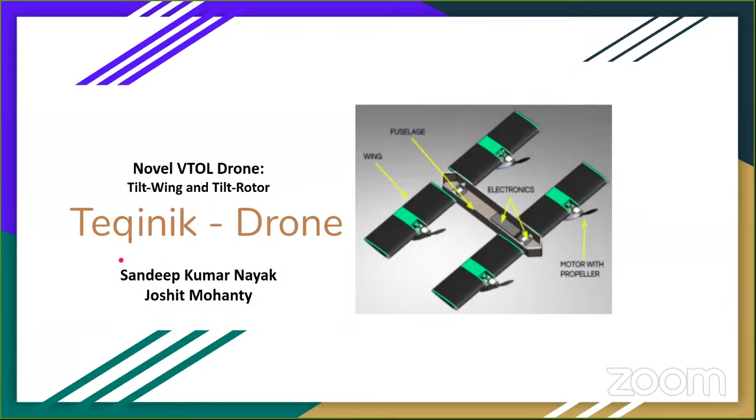Good morning, everyone, and all the dignitaries. First of all, we would like to thank you for giving us this opportunity. The figure you see here is what we are trying to present, a very novel tilt wing and tilt rotor design, and we are going to speak about what's so novel about it. But first, we'd like to give you a visualization of what vertical takeoff and landing is.

The need for vertical takeoff and landing came from the fact that fixed wing has very little agility but high endurance. However, rotor wings such as helicopters or quadrotors have more agility but a little less endurance. So how about we mix and match? That was the idea.

But the main concern for a VTOL is this phase, the transition mode — how do you move from vertical takeoff to cruise condition and vice versa? There are also aerodynamic challenges, for example endurance, but there are slip streams from the rotors, and rotors have a lot of efficiency loss. So how do we cope with this trade-off?

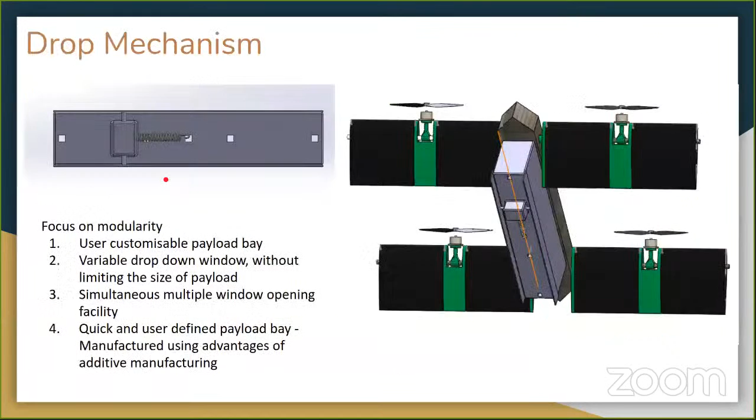This is highly endurant and highly agile because, for example, in a quadcopter, agility is defined by changing the direction and RPM of the motors, and for a wing it's having flaps. However, here we can just directly change the angle of attack of both the rotor or the wing to change direction, so that's quite agile, something similar to that of a hummingbird.

We have a long range, and our payload capacity can vary from 600 grams to 1 kg at a cruise speed of 5 meters per second to 10 meters per second.

We have kept all this design by keeping minimum in mind. So this is the bare minimum we provide at 60% throttle. If we increase the throttle or the speed of the cruise, we can increase the payload capacity further.

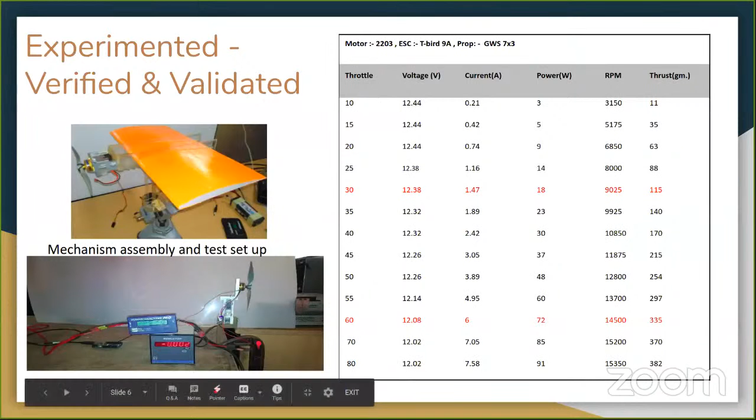We did several testing of the motor and propeller combination and came up with this fact that after doing a wind tunnel test, we get 60 to 70% more payload carrying capacity compared to having the same tilt rotor without a wing. The choice of wing was also very interesting. We kept the coefficient of moment very low in mind, and also balanced a trade-off between the lift to drag ratio.

So that's kind of, minutes are over, one minute remaining, thank you so much. That's the kind of design that we were aiming for.

In future, we want to build the controller because the controller here we think is going to be really important. However, not just the controller, we have planned another thing.

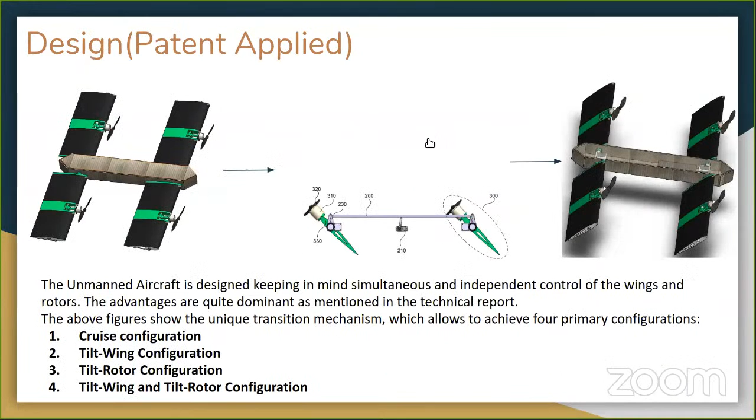On the fuselage, we'll have a sliding mode payload. Instead of keeping a fixed battery and ESC position, we'll have a mount that will slide according to the change in the center of gravity. This will give us very one-directional controllability. If we can have that, then the entire controllability of the aircraft during sudden gusts of wind can also be neutralized.

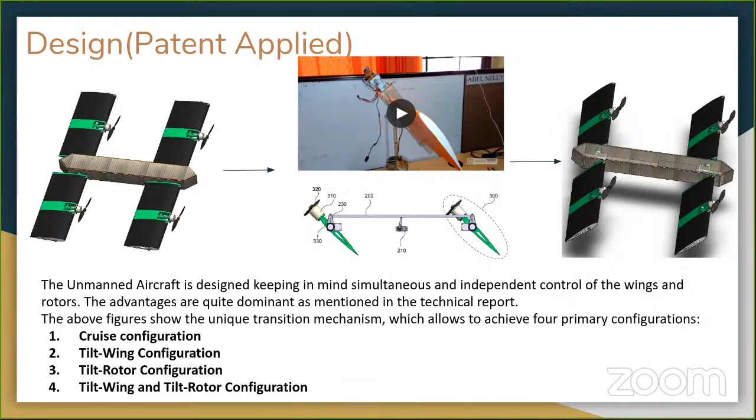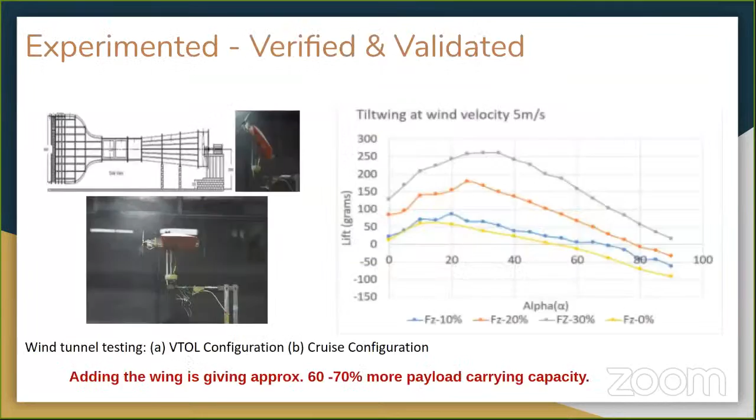Thanks a lot for your presentation, and thank you so much for maintaining the time limit. It's a very good start. Thank you, sir. I would like to invite Shri Deepak Lekhi if he wants to start with any questioning, and then we'll move to Saurabh Bagare.

Deepak ji, would you like to ask any questions to Team Teqinik? You are on mute, sir. You have to unmute yourself. Sorry sir.

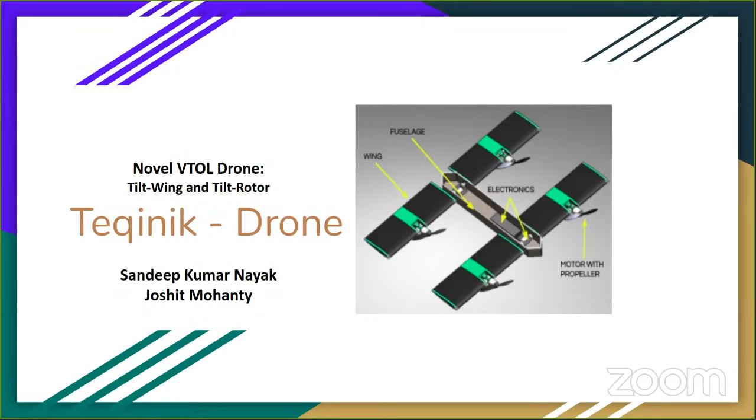My first clarification is on the range of payload you are trying to achieve. Deepak sir, I cannot hear your voice clearly, can you please speak again? What is the range of payload you are planning to do, so how much is the payload? The payload is around 600 to 1 kg we can take.

Look, when you design, and if you say that the payload is 600 to 1 kg, it immediately raises a question on your calculation and feasibility, because 600 to 1 kg is a very large range for a person to state as the payload. If you had said 600 to 650 grams, I would have understood.

So Deepak ji, his answer is that it can carry a payload of 600 grams to 1 kilogram. And what is the all-up weight of this UAV? Deepak sir, I cannot hear. What is the all-up weight of your UAV? The all-up weight of the UAV will be around, if I consider with payload, 2 kg, but only the UAV will be around 1 to 1.5 kg.

So that means around 50% of the weight can be cut to payload, if it takes max for both. So his question is that you are having a 50% payload fraction, you are able to carry 600 to 1 kg in a UAV that weighs 1 to 1.5 kg. The thing is, in this design, if we increase the speed of the UAV, it can carry up to 1 kg, so at minimum it's 600 grams.

Okay, thank you. Saurabh Bagare, would you like to? Yes, I have a few design related queries.

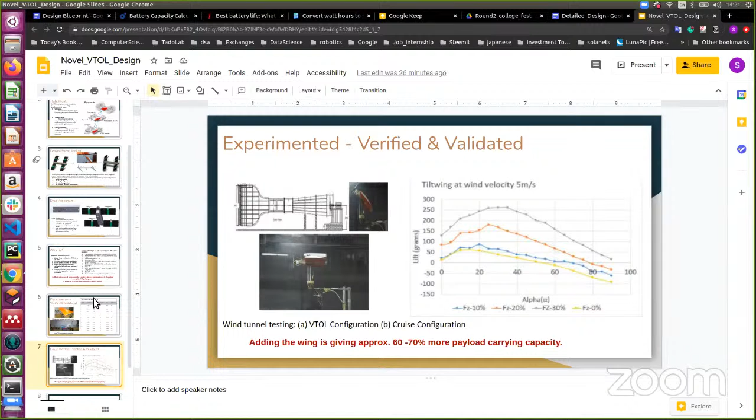Okay, so yes, you have 5 minutes more. Okay, so there is one question which has come from the audience. There is a Dr. Rajesh Joshi in the audience, a very accomplished aero modeler from Nagpur, and he has asked a question regarding the vertical stability during the transition. Can you comment on that?

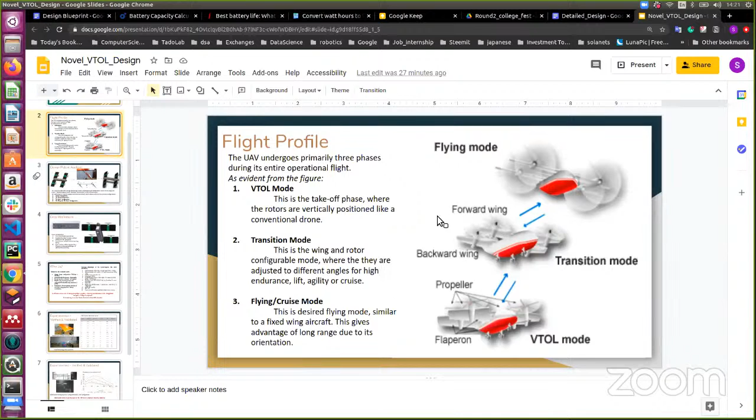Regarding the vertical stability during transition, sir, definitely these are concerns that we also have, for example the downwash and the wing coefficient of moment. Just because the wing is present and is not fully symmetrical, there will be an inherent coefficient of moment. So for stability during the transition, there are two conditions. If there is no gust of wind, no external condition, and we do it in a perfectly situated environment, then we need the sliding mode CG shift in front and a simple PID controller that tries to control the horizontal stability when the

vertical takeoff is happening. Now, let's say there's a transition happening, from this configuration to this configuration. As this mechanism makes the transition, there will be a counterbalance mechanism with the same servo motor, a counterbalance that goes behind. During the transition, if we didn't have a sliding mode CG shift mechanism, the additional inherent moment would have to be handled by changing the propellers or the angle of each of them. But since we have a sliding mode mechanism, this can be tuned along with the transition.

So it is our hypothesis that by introducing this inherent stability of the entire plane, during transition the counterbalance can help with additional balance. So our wings can focus only on agility and maneuverability rather than balancing. That's what we aim for.

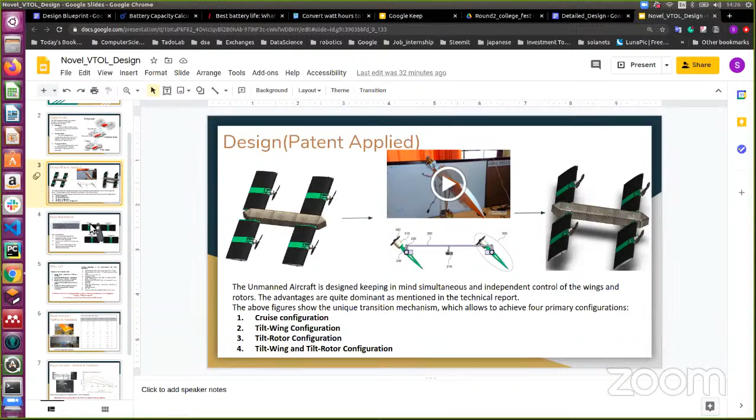I think we'll move ahead in the interest of time, but I must commend you on your attempt to go beyond the ordinary and try out new configurations. On that account, it's a good design, but it is far away from being established as a feasible concept. Yes, sir. All right, let's go ahead to the next team.

The next team I want to invite for the presentation is team Shivam Omni-Role Electric UAV. You can share your screen and start your presentation. Namanuddin, please keep a watch on the time, both for the presenter and the judges. Okay, sir. The judges get 10 minutes and the presenter gets 5 minutes. Shivam Bhandari is trying to share his screen. Your screen is visible now, but make it full screen by clicking the button at the bottom.

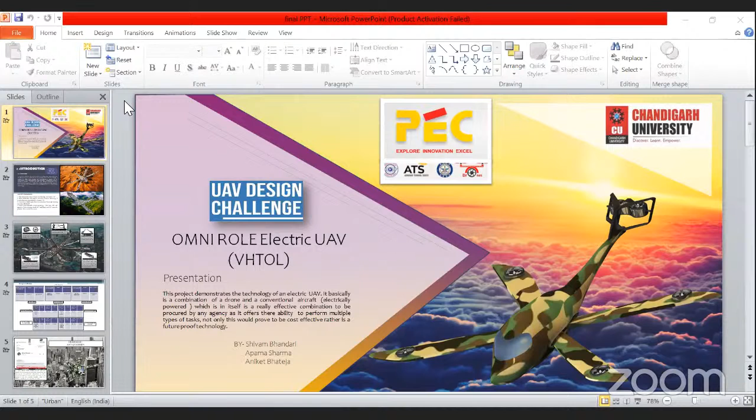Can you make it full screen, please, Shivam? Oh, looks like we have lost him. Shivam, are you there? Can you hear us? Shivam, are you able to hear us? Sir, this is Aniket, I am his team member. I will present this presentation. Okay, can you make it full screen? Shivam, are you able to listen to sir? If not, I'll do it. That is why I have copied your PPTs. So I think, Shivam, you stop sharing your screen. Shivam is requested to stop sharing his screen so that I can present it from my side.

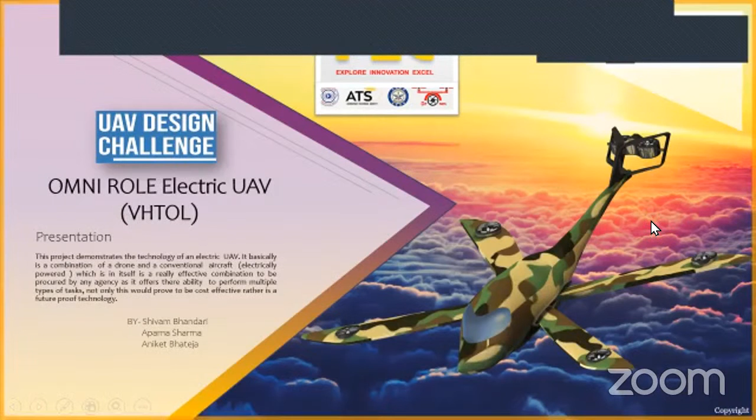Okay, I am presenting it from my side. Just give me 1 minute. Right, so Aniket, you can start. When you say next, I'm going to go to the next screen. Sir, I'm not able to see the presentation. Your PPT is not visible. Okay, wait, I'll stop the share and share it once again. Are you able to see it now? Yes, sir. Now it's visible. So Aniket, when you start speaking, Namanuddin will start the timer, and I will click on the PPT when you say next. Go ahead. Sir, am I clearly audible? Absolutely audible, no problem. Please start.

We all have seen the futuristic cities in a lot of movies where we have seen small drones and UAVs flying among or above the huge skyscrapers. Even in some movies, there are shots which showcase a UAV chasing down fast moving vehicles, tracking down people, and shooting them down with a missile. This is the kind of future for UAVs we are looking forward to. Today we are going to witness one such one-of-a-kind omni-role electric unmanned aerial vehicle.

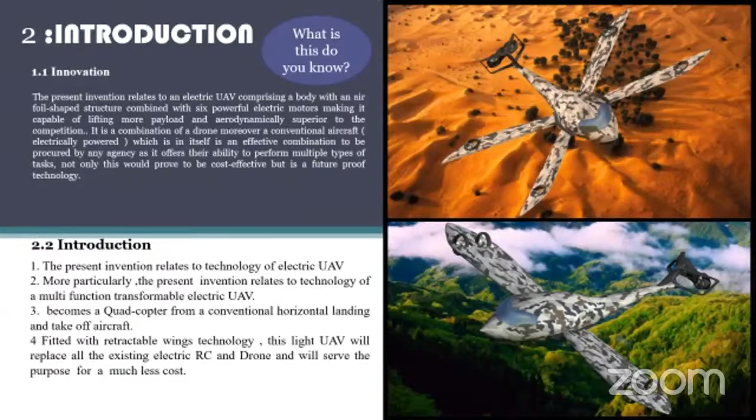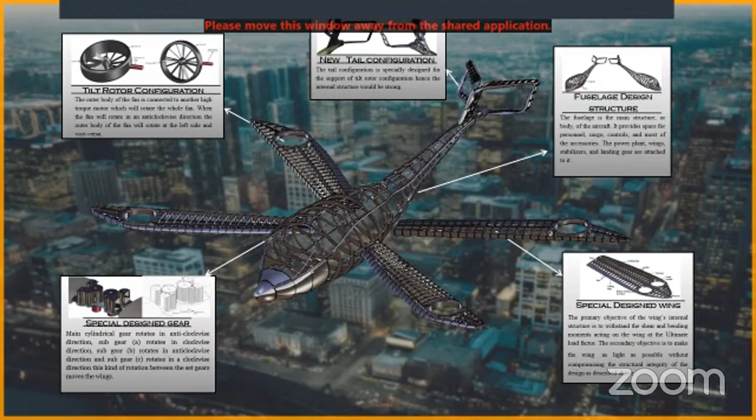On your screen are the key components of our omni-role electric UAV: the special gear mechanism, the tilt rotor configuration motors, the new unconventional tail design, a highly resilient fuselage structure, and a wing design able to withstand all the vibration and disturbances caused by the motors and the loads applied to it. Next slide. This is the internal aircraft structure, made so that it can withstand all the loads and moments applied on it during transition, cruise, and landing. Next.

The main questions asked for this project concern its capability to withstand the vibrations caused by the motors, as it is fitted with 4 motors on the wings and 2 on the empennage. So we have used the finite element method (FEM) to show that it can withstand the loads applied to it. We assumed a simple model of the wing as a cantilever and applied a point load on it for this first experiment. The second challenge we faced was the disturbance created by the first propeller on the second one during cruise. We used Fluent analysis for it and showcased different variations of the fluid, taking pressure as the base.

4 minutes are over, 1 minute is remaining. Yeah, thank you. We have seen that the disturbance is not a deal breaker for this project and we can work on it very easily. Next.

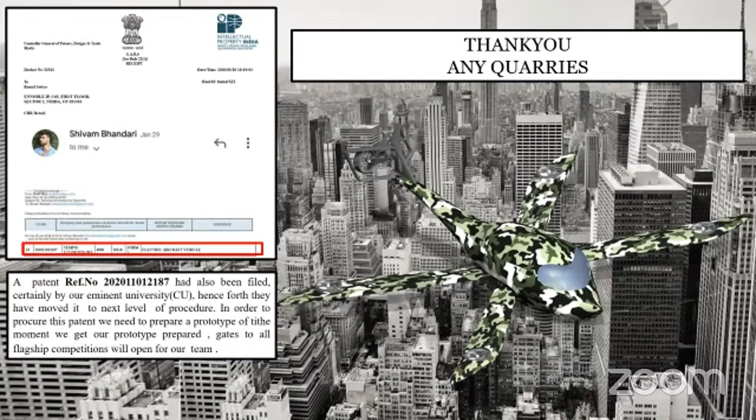Yeah, I have done this. Next. To conclude, I would like to say this omni-role electric UAV has a realm of possibilities to work upon. It gives us an ocean of opportunities in regards to versatility, and I believe this design is a cut above. Thank you.

Okay, thank you so much. Thank you so much for maintaining the time. Yes. Let me now start first with Mr. Saurabh Bagare this time. Hello. Hi. So how much time do I have to count for judges? 10 minutes. Okay, sir. Thank you. So, Mr. Saurabh Bagare, you can start.

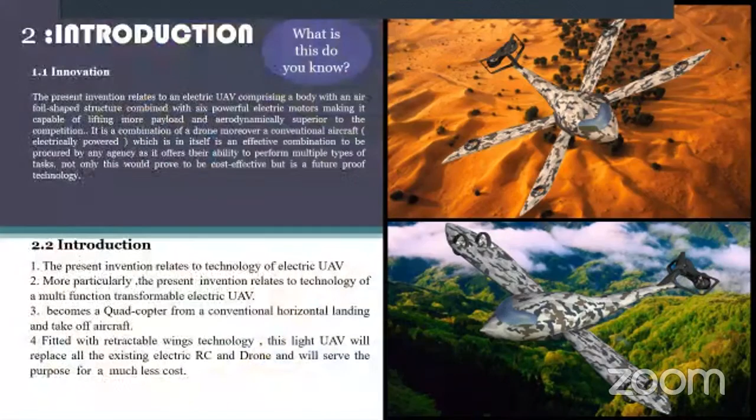Yeah. So as Professor Pant mentioned in the last project, it's very easy to say such a concept, but when it comes to the math, it's extremely difficult. For example, you said you did the testing of fans in ANSYS Fluent, right? Yes, sir. The configuration that you have tested is like a ducted fan configuration. There is no interference between the two fans. But if you see your actual wing design, your front propeller and rear propeller will interfere because of the wing that is between them. So claiming that this won't create any issues just because you have taken an ideal condition is questionable when you're doing Fluent analysis, especially for the aerodynamics of an aircraft.

Sir, I cannot see any wing in between. It's just a ducted fan configuration. Sir, actually, yes, you are right that we have taken this ideal assumption. But this concept is really in its experimental stages. What I meant is that it won't be a deal breaker, because we have gone through the literature, and from this testing we have seen that yes, there would be some interference, but it won't be much, sir. It won't be a deal breaker such that it could not fly in that configuration.

Okay, another question. When your aircraft is in steady level flight, the wing is closed, right? The two wings are connected. So in steady level flight, your wing will act like a symmetrical aerofoil, which means there will be no lift produced by your wing. No, sir. I think the lift would be produced because, if you have seen, it is an elliptical wing configuration. And as we all know, it has the highest efficiency, so yes, sir, it will produce lift.

I'm not talking about the planform. I'm talking about the cross section. The cross section is symmetrical, right? No, sir. We have used the NACA 4412 airfoil, tested its limits to generate lift, and got the desirable numbers. If you have used NACA 4412, then you cannot mount a separate propeller on the front part and a separate propeller on the rear part, assuming that both of them are the same. So this is, I would be honest, we haven't considered this factor, but it's in the testing phase. And I believe, sir, this issue would be resolved if it is there.

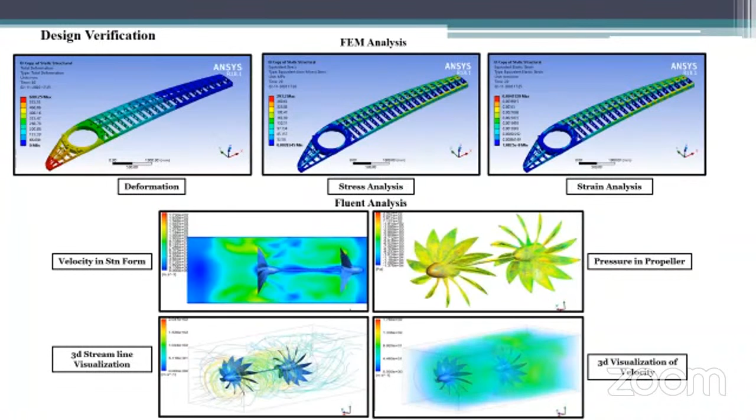I'm sorry, you are trying to mislead the judges by showing some colorful pictures and assuming that we will get impressed by the colorful pictures, but we look at the numbers. Look at the numbers that you have got. Yes, sir. Look at the pressure in the propeller that you have got. It's 3,425. What are the units?

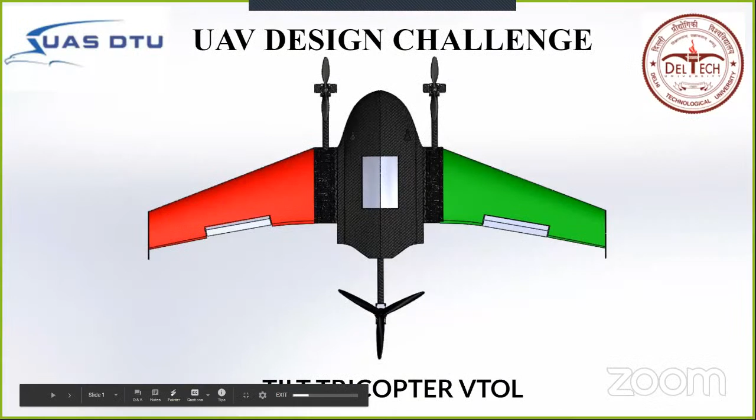Saurav? Am I audible? Yes, you're audible. You can now share your screen. I have allowed people to share the screen. I would request Anand Mohan Singh and Priyanshi Jain to also check their mics. So are we audible? Yes. Priyanshi? Yes, sir. Am I audible? Yeah, but Priyanshi, there is echo from your side. Is the screen visible, sir? The screen is visible. The moment you start speaking, we are going to start timing you. Okay. Fine, sir. I'm ready to begin.

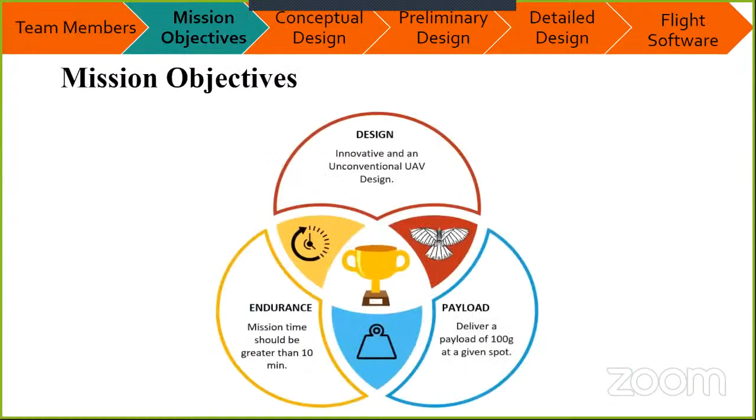Good morning, everyone. I'm Saurav Alawat of Team UASDTU. This is our UAV Design Challenge submission on Tilt Tricopter VTOL. Our presentation will go through the design approach of the mission objective, from conceptualizing the design to preliminary and detailed design phases, concluding with the flight software used. Anand Mohan Singh and Priyanshi Jain will join me in presenting, where we will achieve the mission objectives of delivering our payload on an unconventional design.

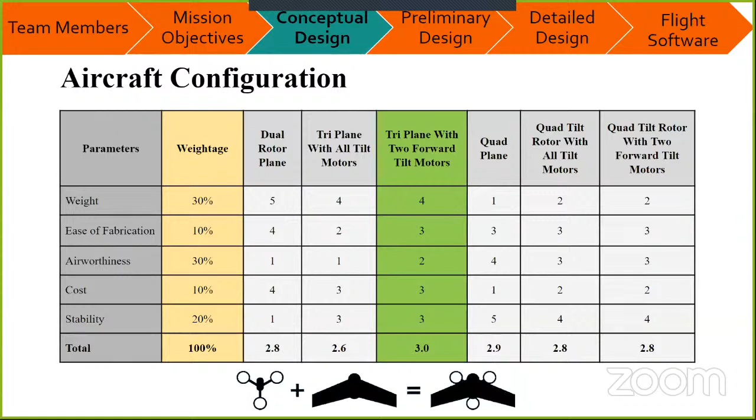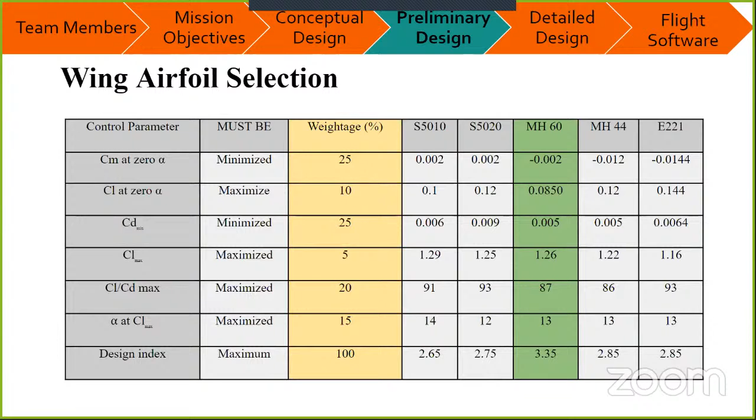Exhaustive research was carried out and different configurations were studied. Keeping the idea of unconventional design in mind, a plane with vertical takeoff and landing is selected. Out of various possible configurations, tricopter configuration was selected considering weight, airworthiness, and stability. To enhance lifting characteristics, blended wing body configuration was selected, which is more aerodynamically efficient. For wing design, various airfoils were analyzed on XFLR5 considering pitching moment and lift coefficient. MH60 airfoil was selected as it has the highest design index.

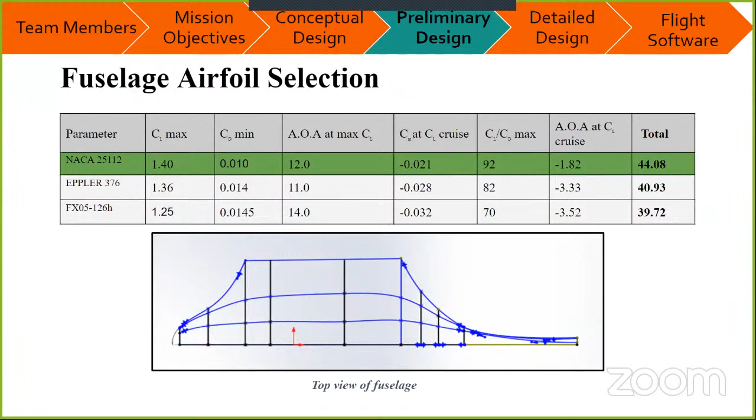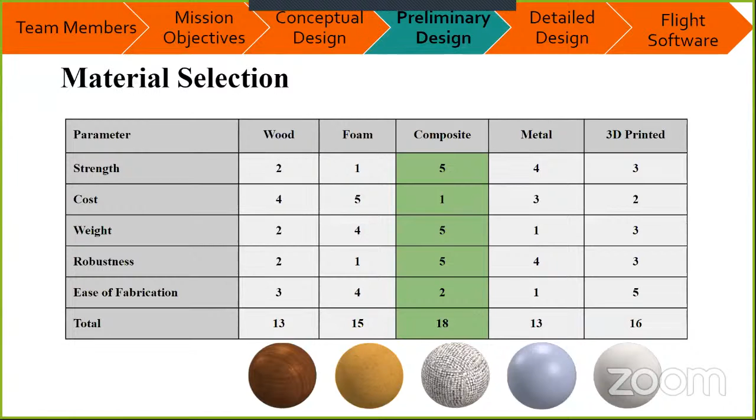Following wing analysis, fuselage airfoil was also analyzed on the same software. NACA 25112 was selected owing to its self-stabilizing characteristics. A brief market review of available materials and manufacturing trends in UAV design led us to choose the highly favorable composite structure with its light and robust framework. Further, the carbon fiber composite was distributed according to various available densities and fiber arrangement types over spars, ribs, and various skins of the body.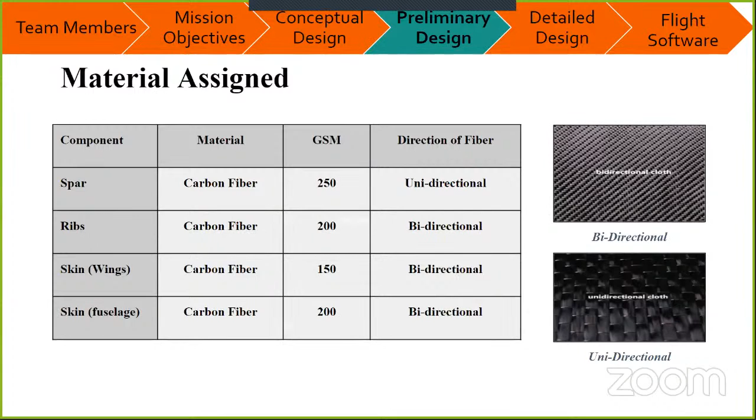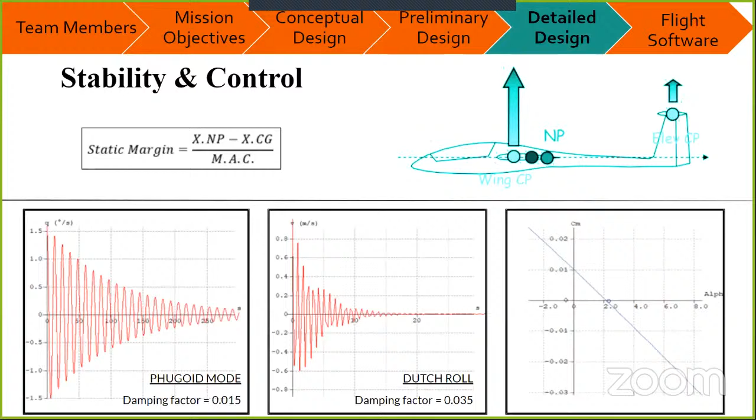All three axes of stability were investigated on XFLR5 by maximizing damping factors of Dutch roll mode and phugoid mode. The aircraft design was reiterated until a desirable value of static margin was obtained. Further, wing parameters were optimized using a genetic algorithm with certain variables and constants. Input parameters like random population converge to an optimum solution until net fitness of the generation reaches a maximum saturation point. CFD analysis was performed at every design stage to maximize lift-to-drag ratio.

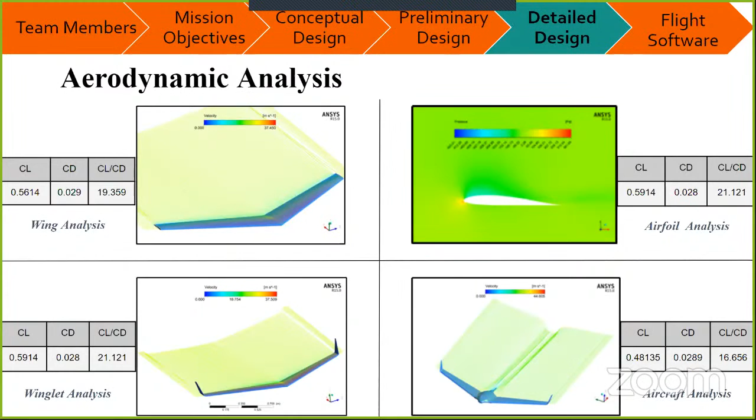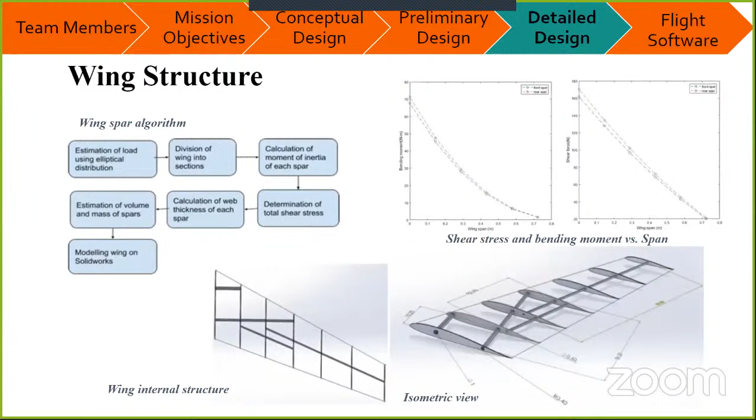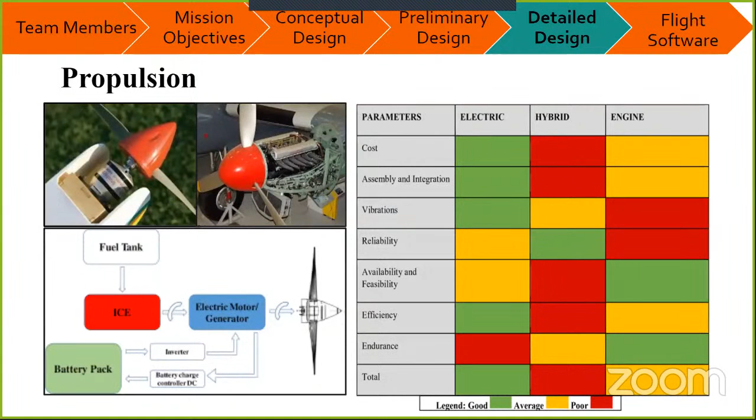Structural analysis on key design points like the motor boom and wing was conducted, and results were obtained on Abaqus by various iterations of loads. An algorithm which refines our wing geometry underwent steps of estimation of load, division of sections, to the calculation of moments of inertia on each of these parts to determine its final geometry. An important aspect of maximizing endurance was propulsion selection, where we arrived at an all-electric solution owing to its ease of operations and overall efficiency. The electric drivetrain was further analyzed and optimized, and the final motor and propeller configuration was selected for both hover and cruise specific motors.

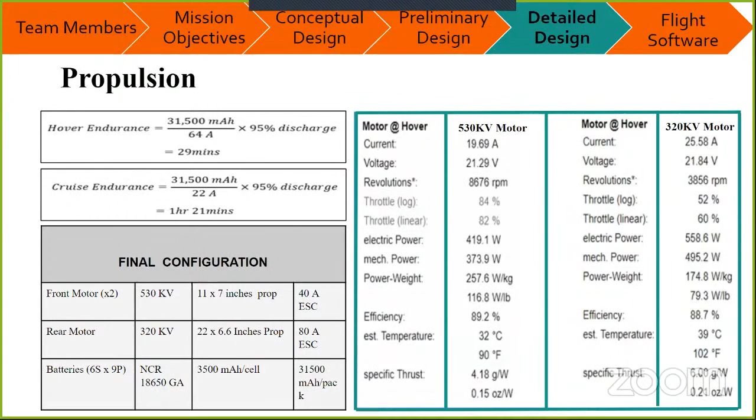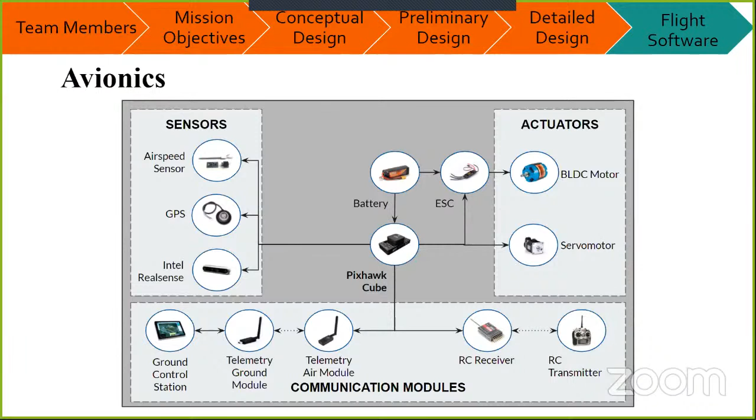A special consideration was given to designing and perfecting the tilt mechanism and its modus operandi of an unstable design governed by the autopilot cycling between both the hover and cruise segments of the flight. Pixhawk Cube is our flight controller, which controls actuators like servo motors and BLDC motors using the sensor data from various sensors such as airspeed sensor, GPS, and Intel RealSense. A ground control link is maintaining communication with the tricopter through telemetry, and an RC link is used by the safety pilot for manual control.

Over. 1 minute is remaining.

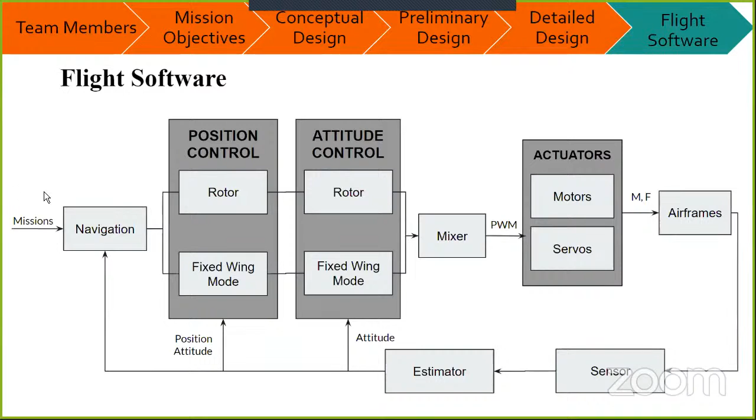Thank you. The sensors, with the help of estimators, provide position and attitude feedback to the previous loops. That would be all. Thank you.

Okay. Lekhi ji, shall we start with you? Yes, sir.

Sir, my first question is about this three propeller scheme you have used. Do all the three propellers have the same motor power? No, sir. The forward motors are actually half the thrust of the rear motor. Basically, the center of gravity is placed on the midpoint of the y-axis in the direction of motion. The rear motor has twice the propulsive power of the forward ones. Basically, we iterated various motor configurations on how we could optimize our cruise endurance. The forward motors are pinpoint designed for cruise efficiency.

Like when they operate at their pitch speed of 25 meters per second, the UAV will be flying at 25 meters per second, and the thrust produced will be equal to the drag of the aircraft. The remaining thrust during hover phases will be handled by the rear motor and the front motors together. And you are only tilting the front propellers, not the rear one? Yes, sir, we are only tilting the forward ones. Reason for that? We have sufficient thrust from the forward motors to complete all segments of our flight. The forward motors have a maximum T/W of 0.8, which is enough for any normal maneuvers in the cruise condition.

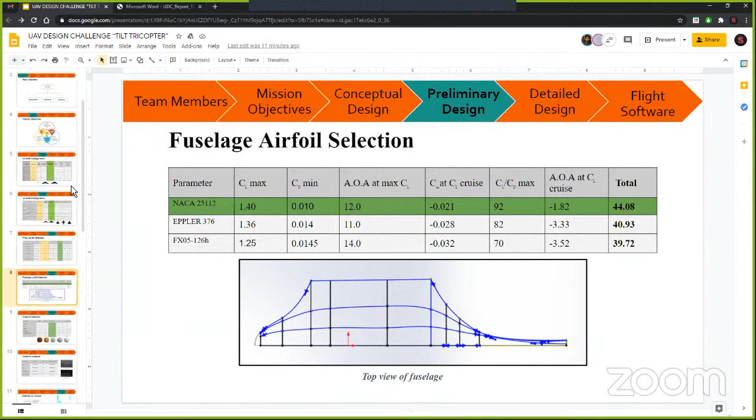Do we care about that? We just want an aircraft to turn in any way possible. If you are flying and you want it to turn, multi-rotor mode, we are operating in a tricopter configuration. A tricopter is inherently stable with its vector yaw mechanism. So when it's hovering, it can act as a normal multi-rotor and do its roll.

I meant a steady level turn. In a steady level flight, we have our ailerons. We fly as a normal blended wing configuration. We have Skywalker X8 models available in the market, so we have ailerons. So my main query is, you will turn using the aileron coupled motion, right?

Yes sir. So because of that aileron coupled motion, you will have a roll moment that will cause your propeller at the rear to cause a drift that will change the altitude of the aircraft. The rear motor is not operational on the cruise segments of the flight, it shuts down during transition. So it shuts down whenever your aircraft is flying in steady level? Yes, the forward rotors will tilt forward and it will act purely as a fixed wing during the cruise conditions.

Then my next question is, in your comparison graph that you have shown with your configuration against other configurations. Yes, this is a diagram. Based on the values you have put, I can see that you have assumed your design to be better and put the values accordingly in the table just to show that your design is better. No sir, the fact that we assume our design is better is based on the market research that we conducted.

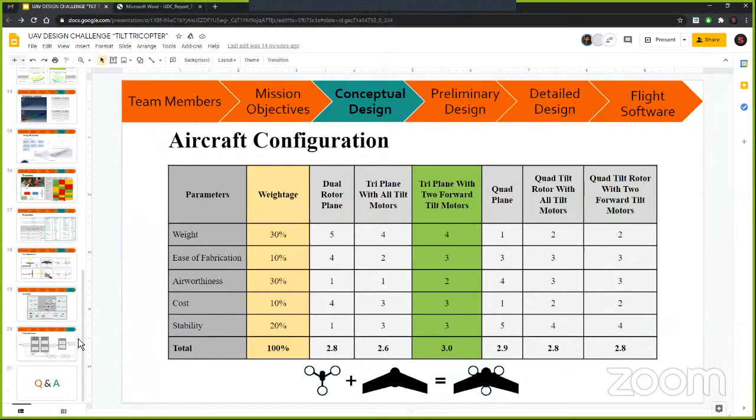Okay, my last question is to your control systems person. You're using PX4, right? Yes sir, we are using PX4. PX4 has no dedicated mode for your configuration. It has sir, it has a dedicated mode for blended wing and a dedicated mode for tricopter. When you are operating in a VTOL plane configuration, you can enable your Q tilt mask to 7, which is a tricopter.

So you have coupled them? Yes, we have actually tried to simulate it on the SITL software, and we are already working on developing this concept. Okay, but I believe you will need your own code, that's left for the future. Then that's it from my side. Yes.

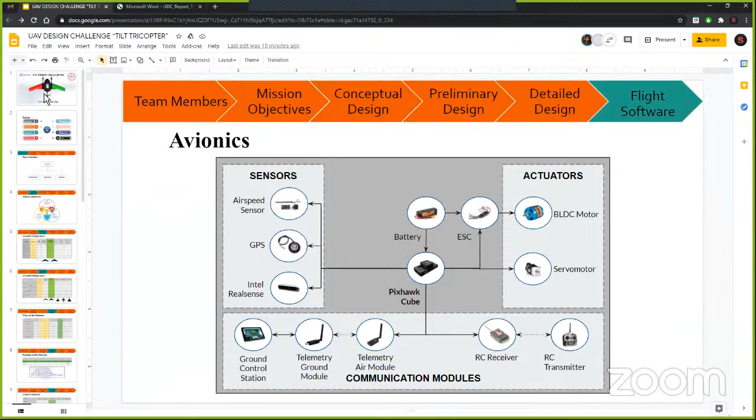Okay, so I only have one comment. If I look at the constraints specified in the document given as the brochure, there is a clear mention that no fixed wing aircraft qualifies for the competition. So you have designed a fixed wing aircraft, but as per the problem statement, a fixed wing aircraft is not feasible. This is a VTOL concept, it may be, but it has all the advantages of a fixed wing aircraft. No, it is a fixed wing aircraft.

Understood sir, and the document clearly says fixed wing aircraft is not feasible. But all our design was towards optimizing the VTOL, even the fixed wing sizing was done so that during the transition phase from multi-rotor to fixed wing... Whatever you may say, but the constraint clearly mentions no fixed wing design will be feasible. Have you read the document carefully? Yes sir. So then why did you design something which is fixed wing when it says very clearly that fixed wing design is not feasible?

I believe that the VTOL qualifies for an unconventional design. No, this is not a VTOL design competition. This is a design competition where there is a constraint clearly mentioning, given in bold: no fixed wing design. No fixed wing aircraft, quadcopter, or conventional design qualifies for the competition.

Then why have you gone for a fixed wing design? I cannot justify more than what I just said. I believe that the VTOL was an unconventional design and it did not qualify purely as a fixed wing. That's why. I have made my point clear because this has been raised by somebody in the audience, very rightly, saying that this particular design does not qualify simply because it is not meeting the constraint. If you have an answer, we can take it. If you don't, unfortunately we will have to disqualify purely because of the problem statement.

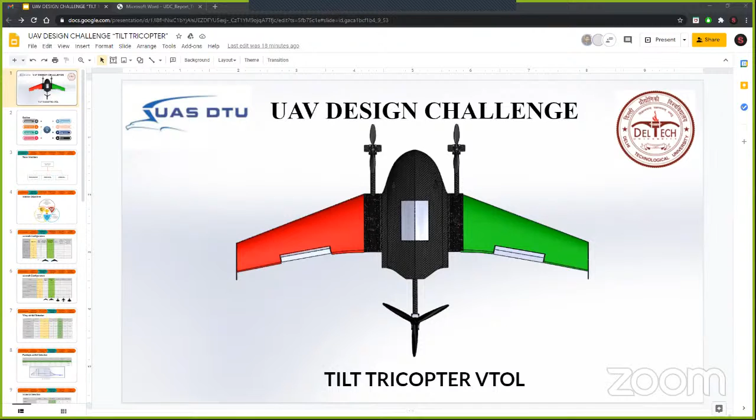I have no questions. You have made so many claims in your design, we don't even have time to go through all of them. For example, you are going for a single spar structure on a wing, which is going to be a fixed wing. I have my doubts whether a single spar structure, especially in the outboard section, right from the mid-span, a single spar, how are you going to take care of the torsion? Tell me. So we have two layers of carbon fiber wrapping the wing, and we're pretty sure that with that layer we'll have structural integrity. Are you saying that a single spar wing...

So we have actually fabricated such a... Let me complete my question. Are you saying that a single spar wing from mid-span can be made torsionally stable just by putting a carbon fiber skin over it? Yes, so we'll also have no discussion. No discussion, thank you so much.

If you are sure, I want to add one last point. I'm asking you a very standard technical question, you have to say yes or no. Yes sir, it will have torsion in it. It will rotate, but it is under our design limits, and we have already manufactured such designs in our laboratory, and we have already flown them.

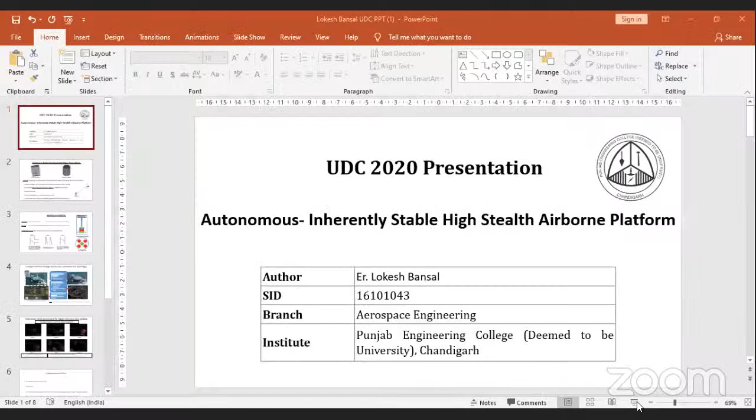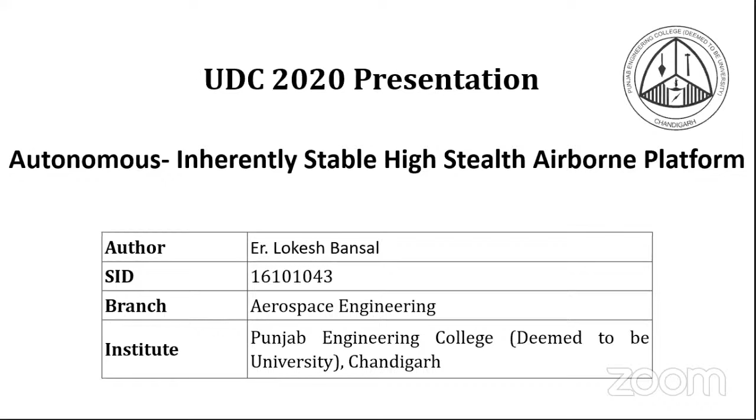Good morning everyone. The topic of my design is autonomous, inherently stable, high stealth airborne platform. Coming to the stealth aspect of the design, the outer body has diamond-shaped sharp projections. These projections will reflect away the radar waves from the source of radar signals. In addition, the surface is coated with radar absorbent material to provide extra stealth. Further, in the UAV there is no heat emitting source, hence no heat sensing device can detect the UAV. Furthermore, the two counter-rotating propellers are inside the casing, resulting in much less noise compared to conventional configurations. Also, the color of the UAV is grayish dark, which results in poor visibility, especially in evening or night times.

Now talking about the working and stability of the UAV. For vertical stability, it is inherently stable because the CG lies below the center line. Then the two counter-rotating propellers provide yaw stability. Now coming to working: for thrust, the two rotors will throw the air through the four nozzles at the bottom surface and create thrust.

For flight direction, we control the direction by thrust vectoring. It can be done by following three methods, as you can see: method 1, method 2, and method 3. In method 1, the nozzle is divided in horizontal and vertical directions, and the flow is divided between these two nozzles to get the desired force components.

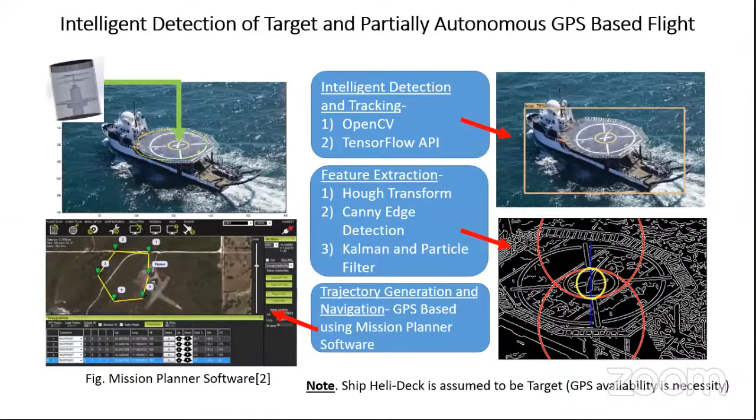So the UAV is able to recognize the environment as well, then detect exactly the center point of the target and track it. So this is the flying and tracking of the target.

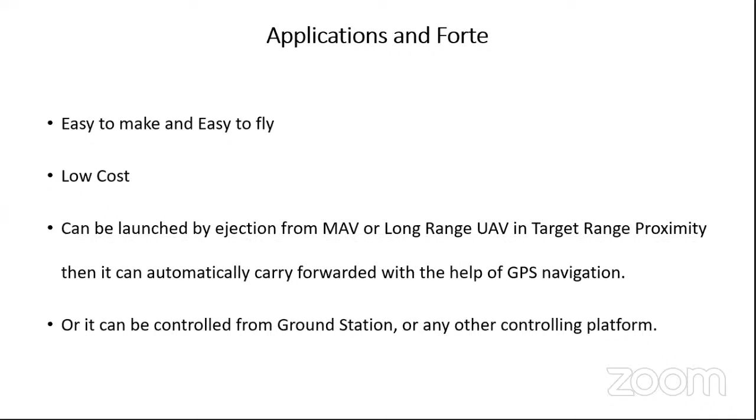Further, it can be launched by ejection from a manned aerial vehicle or long range UAV in target range proximity. Then it can be automatically carried forward with the help of GPS navigation, or it can be controlled from a ground station or any other controlling platform. Thank you very much.

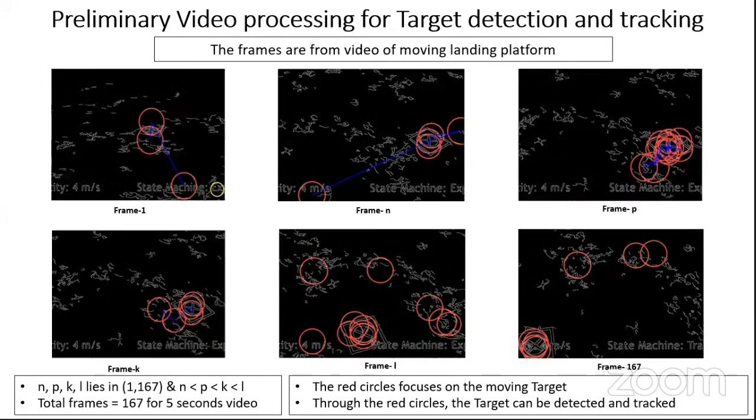Okay, so let us start with Saurabh Bagare. Yeah, okay, so Lokesh. Yes, sir.

So you told me that your propulsion system consists of nozzles, right? Yes, sir. Have you done any analysis on the choking parameters of the nozzle?

No, sir, choking analysis has not been done, but I assume that choking should not be there, as the nozzle has sufficient area. No, what do you mean by sufficient?

See, if your propeller rotates at some RPM, producing some thrust, and then that air goes into your nozzle, how can you guarantee that the dynamic pressure the air applies on the throat of the nozzle is less than the ambient pressure of the air around it? If it is more, then the nozzle will be choked, may be the area.

Sir, that is one calibration and design aspect that can be rectified during design. I assume that is a rectifiable problem, sir.

No, how will you rectify it then? Because you are constrained by the size of the propeller. No sir, the RPM is low. We are taking low RPM and more diameter of the propeller.

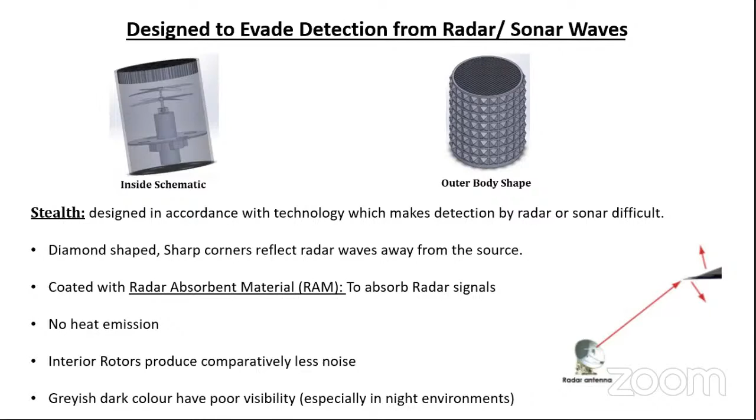Yes. Next point is, where are you planning to put your payloads if everything is ducted? Yes, sir. Payload is here, sir. You can see at the bottom of the hub, sir. No, but do you think its field of view is restricted very much? Field of view of payload, is it a deliverable or is it a capturing thing? Sir, your voice is breaking, sir. Yeah, I will repeat the question.

So his question is that you are putting the payload in the hub in the center. It will have a very small field of view because it is mounted at center on the bottom. So it's going to look only at a limited area. Yes, sir. It will go just vertically below. No, see, it is mounted inside because your whole thing is enclosed inside the body. So I think only the lens of the camera is going to be pointing outward. So it will have a very limited field of view.

Okay, the other question is that, Acha Lekhi ji, any more questions you have? That's it, sir. Thank you.

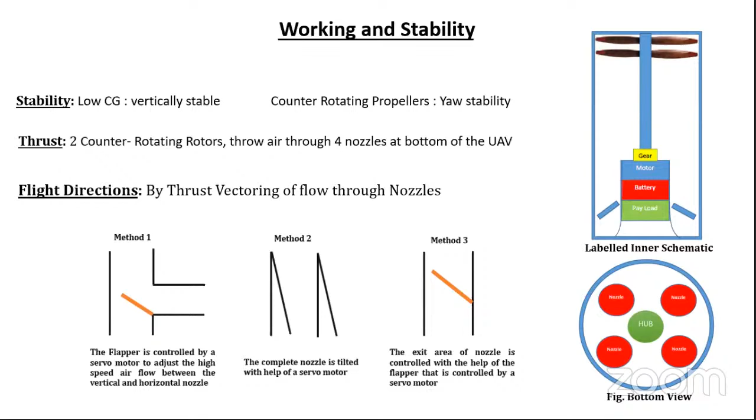Okay, so there is a question to you, Lokesh, about how you are making such a rough non-aerodynamic body fly. And also, what kind of cruise velocity are you expecting? What is the speed you are expecting, Lokesh, from this design? Lokesh, are you able to hear us? If you're not able to hear, then maybe you should answer your question via the chat window. What is the cruise velocity and how are you going to make such a rough non-aerodynamic body fly?

And also there is a question about the thrusters in the bottom, CG above that. So this is going to be inherently unstable. So how are you going to manage that?

Okay, looks like we have lost Lokesh on the audio. We are not able to hear. I'm not even sure whether he is able to hear. Let me see if I can send him a direct message.

Okay, looks like we have. So, Namanuddin, are you able to hear me? Yes, sir. Okay. I think we'll have to move to the next. Hello. Lokesh, good. Nice to have you back. Okay, sorry, Lokesh, sir. Could you hear the question, Lokesh? Yes, sir. What is your answer? Because we don't have time. This is the last question. Shall I repeat the question for you? Yes, sir. Please, sir. Repeat, sir.

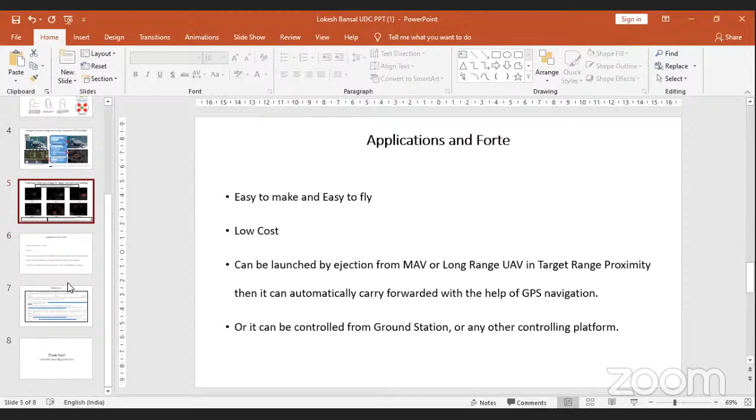No, you also said that it can be controlled from a ground station. Anyway, the thrusters are at the bottom, so the CG is above that, and that is going to be inherently unstable. How will you manage that? In the cross section, if you go to slide number 3, we see, sir, that the thruster is in the bottom, and payload, battery, motor is above that. Okay, so how is it going to be stable?

Sir, vertical stability, I think, should be there. The thruster... Time is up. Okay, hello, time is up. So we'll go on now.

Now we are left with only one team, that is Team Maverick. Okay, so Team Maverick Skywalker, you are welcome now to share your screen and make your presentation. Yes, sir. Sir, is my screen visible? Yeah, make it full screen. Right, it is visible. So can I start? Yeah, you can start. Namanuddin, please note when he starts, you have to start the timer. Okay, go ahead.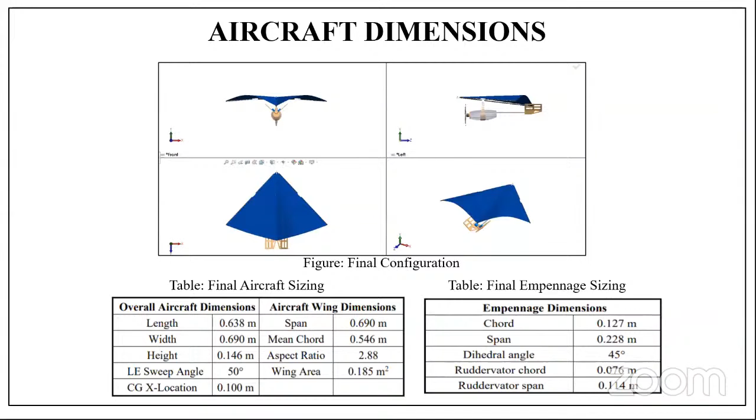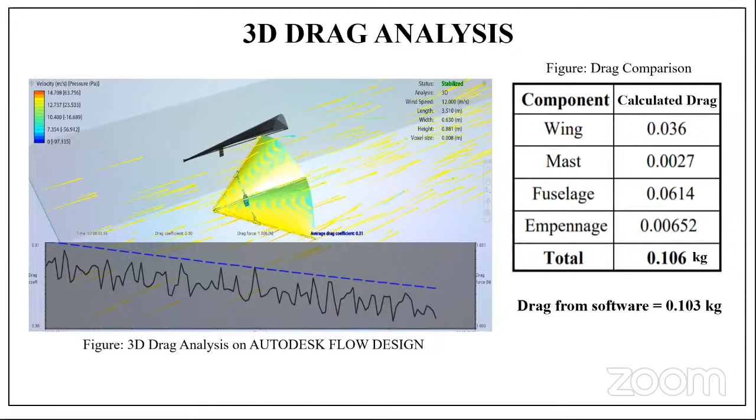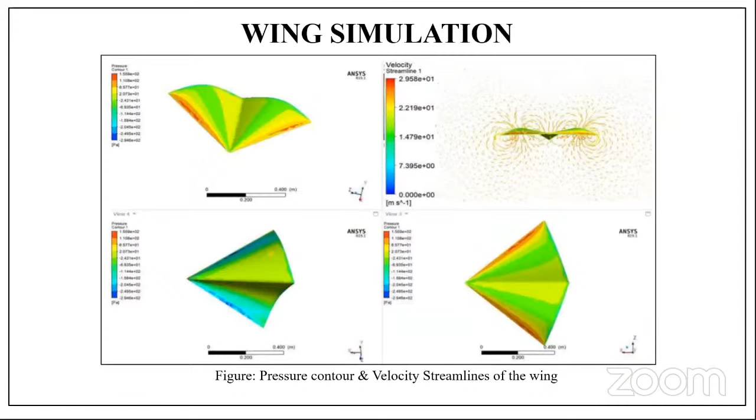Just like performing calculations, we have also calculated the drag of each component through empirical formulas, and we validated the value through a 3D drag analysis, which we performed in Autodesk Flow Design software. We've also performed the wing simulation in ANSYS CFD Fluent 19.1, where we obtained the pressure and velocity contours.

Coming to the material selection, once we were done with the aerodynamic calculation and CAD modeling, we started selecting the material. First of all, we explored the different materials available in the domestic market that we can possibly use for our design. Once we got the list of materials, for example, considering the fuselage, we applied different materials and the load, performed static structural analysis, and found the material showing the least deflection. From there, we concluded that carbon fiber was showing less deflection, so it was selected. Following this same methodology, we selected the material for the other components of our aircraft.

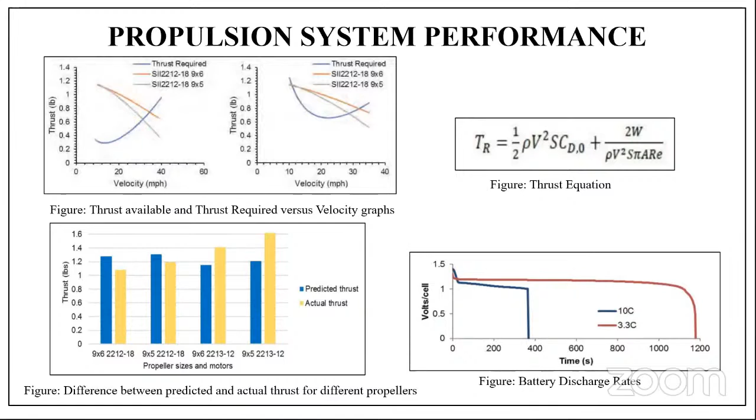Coming to the propulsion system, based upon our previous experiences, the practical testing, and the estimated weight, we have calculated the required thrust. Using that thrust, we explored the different configurations of motor and propeller that could satisfy the required thrust. We plotted the graph and found out that the Scorpion 2212 motor, when used with a 9x6 propeller, was giving better performance, keeping in mind that we have to maintain the smallest and lightest weight possible.

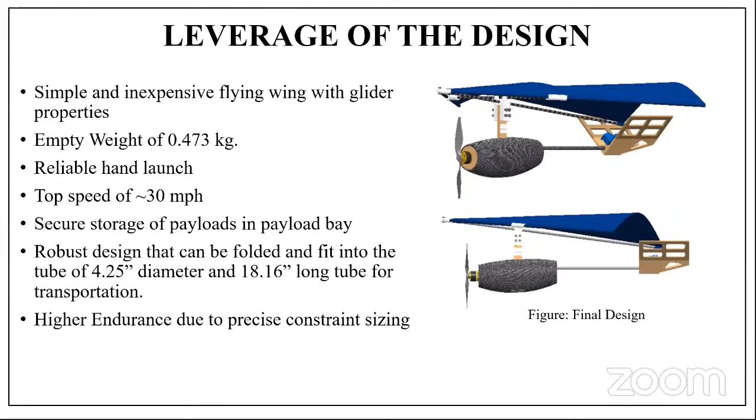That's all. Okay, thank you so much for your presentation. Saurav, let us start with you.

So I appreciate that you considered a Rogallo wing as a configuration, but I would like to point out that there are some fundamental flaws with your design. Yes, sir. So first of all, you did your test in ANSYS static structural for a wing that is made up of fiber. No, sir. The wing is made up of fabric. The fuselage is made up of carbon fiber. Sorry, fabric. So for a cloth material wing, you are doing static structural.

Can you show your static structural FEM analysis? Show it, one above, slide number 6. So this is the wing simulation. Okay. But the wing is cloth, right? Yes, sir. How can you do static structural on a cloth? Sir, this is a CFD. Yeah, so you have to do dynamic CFD for a cloth. That's how it works. Yes, sir, I totally agree with you. Actually we didn't know that we had to use a different CFD for this one. Okay, good that you realize.

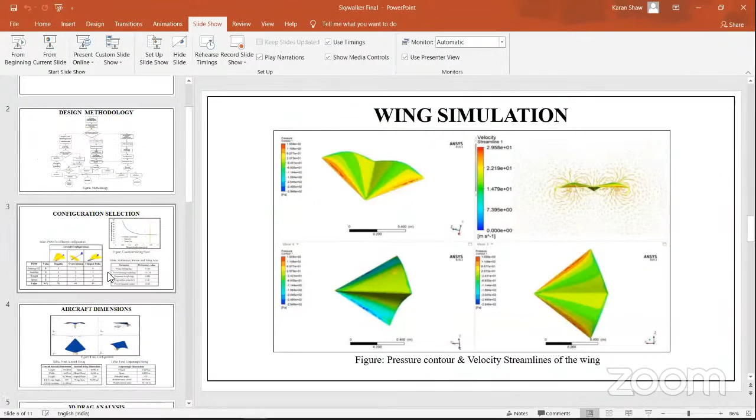But my next point is, a Rogallo wing has to be maneuvered by controlling the fabric of the wing. But you have put a separate empennage. And that's one big flaw, because whenever there is crosswind, your wing will catch it. Yes, sir. During the literature survey, we found out that in the 1950s NASA was studying hand launch vehicles and performing experiments on this design. But they had some issues, and their design was unpowered. For our case, we designed a powered UAV, but there are still certain issues related to stability. So we decided to use...

Yeah, that is all valid, but you're not getting my point. Historically, the Rogallo wing has been controlled like a parachute. You pull and push the fabric of the wing. But in your case, I cannot see any control or any motor that can control the fabric of the wing. And that puts it in a very difficult position to counter crosswinds, because there is nothing to pull the wing in the direction opposite of the crosswind. And since your wing area is very high compared to your entire aircraft, your aircraft will just drift away with crosswind unless you pull the wing.

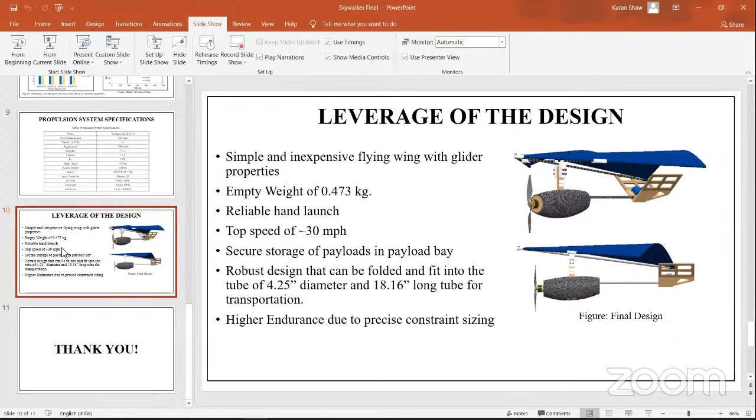And another thing is, I cannot see any structural frame that is guarding the fabric wing. I can only see the T frame.

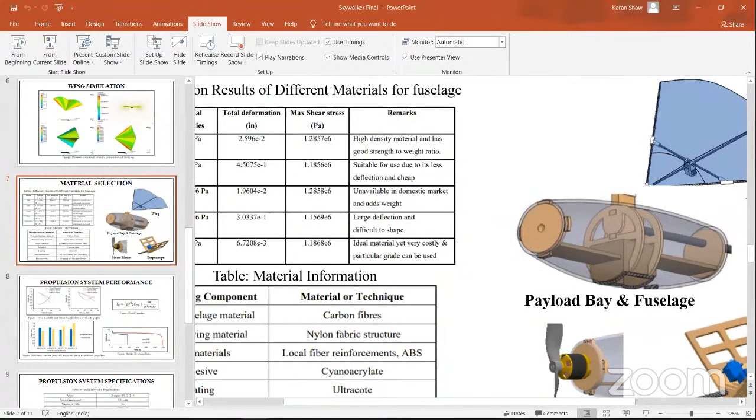Sir, can you please repeat your question? Like, how will you guard the wing? You have to mount the wing, basically the fabric, such that it won't fly away, right? Yes, sir. So how are you sealing the fabric on the outer frame of the particular triangle, basically? Can you zoom into that triangle? Wait, sir. Yes, sir, that is also one of the issues that was faced previously.

So there is one material that is used in stitching clothes, like if you see the collars, they use that material. I don't know its name, but it is the kind of thing that makes the structure stiff. So when using the fabric, we thought that if we could use that same material in between the fabrics of the wing, maybe we can make our wing just like what is shown in the CAD model. Okay. And my last question is, why have you gone with a V-tail configuration?

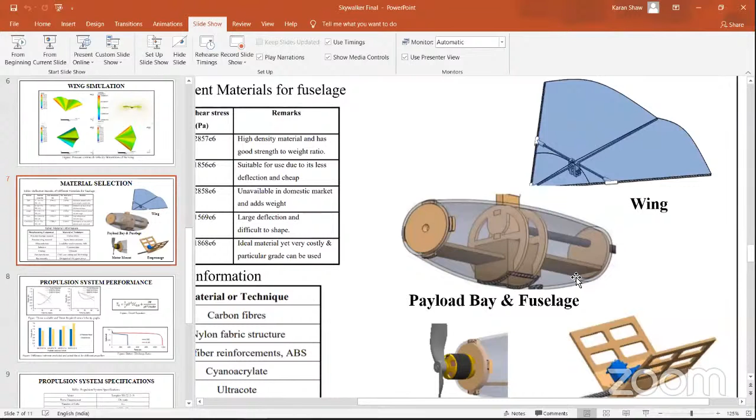Okay, so I'll go forward and answer this, Karan. We majorly went for the V-tail because firstly, our structure itself is very lightweight. So if we go for a tail, we have to make sure that it would be lightweight as well, to withstand at the same time. Secondly, it also has lesser drag as compared to other configurations.

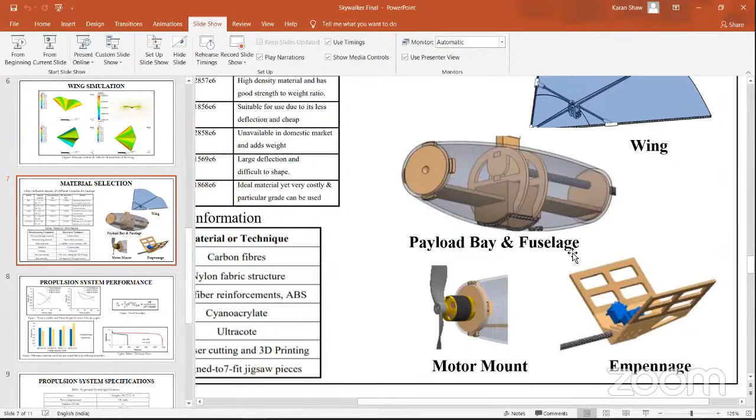Yeah, but I cannot see any rudders or elevators on the tail. There are ruddervators, sir. Okay, there are ruddervators. I cannot see them in the CAD, that's why I asked. Sir, there are ruddervators. Okay, cool. Thank you. Thank you, sir. Lekhi ji, any questions you have?

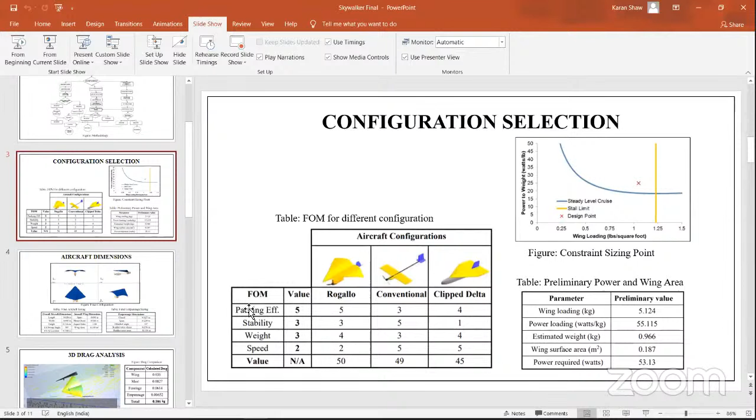On the same slide, slide number 3, you have talked of a packaging efficiency of 5, something like that. Sir, your voice is breaking. You have talked of some packaging efficiency of 5 in your design. Yes, sir. I have mentioned here, packaging efficiency. Correct. Now go to slide number 7 and make it full screen, please.

When I see your fuselage, in the center you are using payload, correct? That is a payload window. Yes, sir, there is a payload bay in the center. Correct. So if you see this fuselage, you are not even using 50% of the space. Yes, sir. The reason being, first of all, we wanted to stick with the competition constraint that was provided, and secondly, we could have used more space, I totally agree with that, but we also wanted to use as little material as possible.

No, his question is that your fuselage is having very poor packing efficiency. In the sense, you are wasting space. Nothing there. That is the question. Because in UAVs, when we talk about small UAVs, we use space maximally, because volume comes at a premium. So you could have made a much smaller fuselage. That is what he is saying. Why have you made such a large fuselage with empty space? Yes, sir.

Sir, in the image it may look like a bigger one, but in actuality it is small. And secondly, we wanted to secure some space for electronic components. Previously, when we were making the CAD model, we were also doing the CG calculations. So we wanted to secure some space so that in case the CG shifts after putting the load, we have enough space to shift our electronic components to maintain the CG.